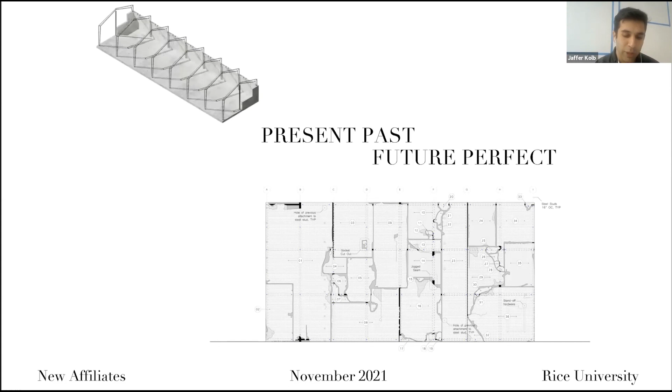A new life teased out of or inserted into exhausted structures. So in a way, Liz, you put a name onto something that we often think about, but maybe through slightly different language, and that's exciting.

So we're New Affiliates. I'm Jaffer and this is Ivi, and I'll start off and she'll pop in a second. We started 5 years ago, actually almost to the day, so in maybe a week or two is our 5th birthday, which is an exciting time. So maybe we'll just consider this our birthday party. Thank you for hosting it.

We do a lot of different kinds of work, from product design to ground-up buildings and everything in between. Thinking through past lectures on the topic of identity, we describe ourselves, I think, in a lot of ways. We've described ourselves once as victims, or maybe byproducts of New York City itself. We've described ourselves as necromancers, bringing to life zombies and other figures of the undead.

We've described ourselves as designers, as preservationists, never as theorists, but maybe as thinkers to some degree, as insiders as well as outsiders to the profession of architecture, which makes me think maybe we're actually just really good at code switching and performing different roles, recasting ourselves based on whatever clothes we happen to be wearing that day. But either way, there's definitely a question of identity, and us trying to formulate and reformulate the way in which we operate vis-a-vis the work and practice of design at large, over and over again.

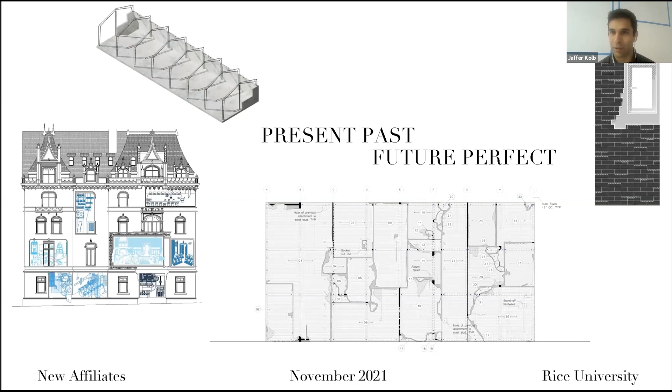I'll echo the thanks and say hello, and maybe just dive into the work and look to illustrate the introduction Jaffer just offered.

So we're starting with 2 building projects, both commissions to convert abandoned manufacturing units into art studios. They're located in East New York, just a few blocks apart from one another, done for the same owner. The one on the left was completed a few years ago; the one on the right, we're still working through the design. They seem like a good place to start to situate our practice as a prototypical New York endeavor—an intriguing place where adaptive reuse is normalized as this act of bending buildings into new versions of themselves, and at the same time, a set of buildings that we're very aware represents new users in known conditions.

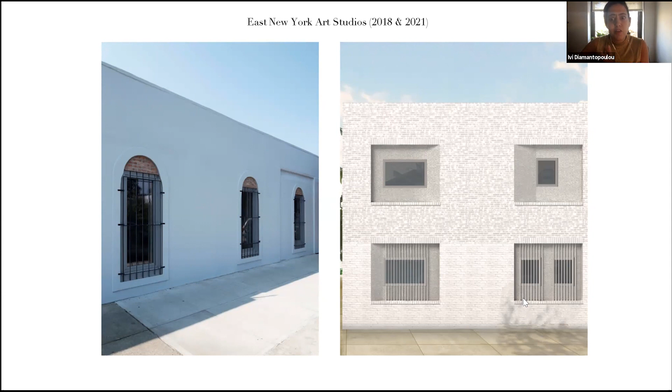We're on the edge of Brooklyn. We're very mindful of a neighborhood that's changing, and the way in which we respond to it has been critical. Luckily, alongside a great client who's engaging with local conversations and is invested in community building, we start these 2 projects.

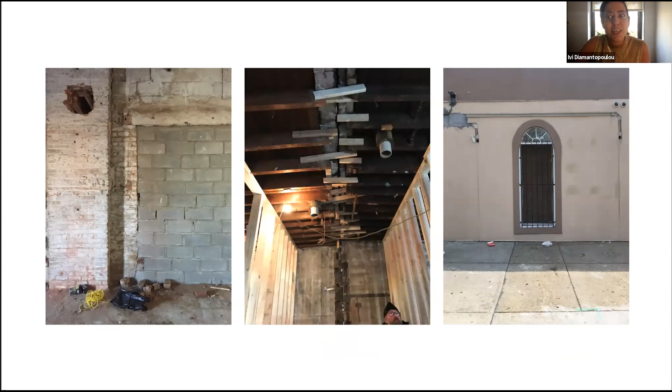With the first one, we're confronted with a long, skinny building—over 100 feet, with over a century of being used, reused, and misused. In these many decades and lives that the building has previously held, we enjoy seeing them inscribed on its surfaces, in the way it gets us to want to know more about what has happened.

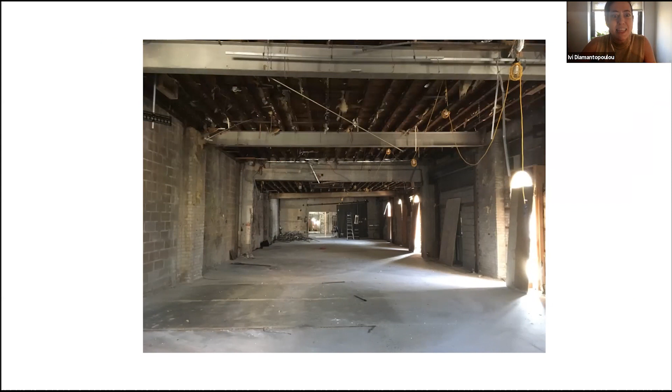So we start design from 2 ends at once. On one hand, getting to know the building, unraveling its layers and its Daedalus-like interiors that somehow compartmentalize this massive, overhauled structure. From the other end, developing a loose understanding of our program's relationship to the street and the shell, a little bit like a master plan.

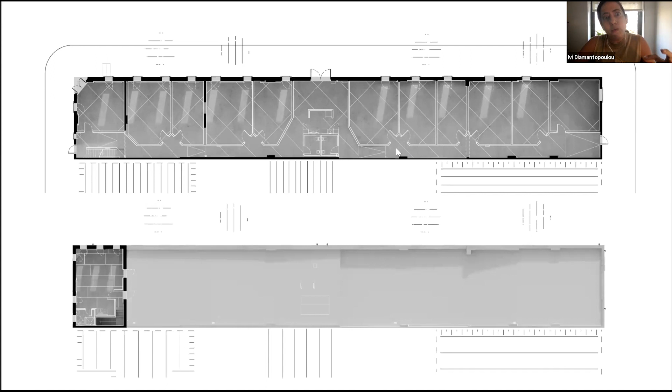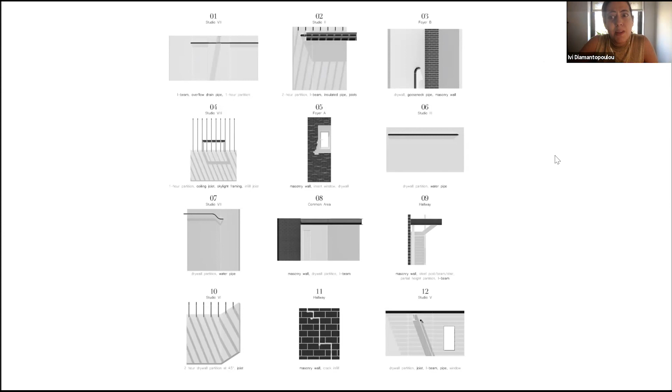It was apparent design-wise that we wanted to attach studios to the windows for light and air in the front, and then keep circulation in the back, devising a way to interact with the relentless linear character of the building. From there, we wanted to bring the 2 together—so our 2018 idea of how this building could lend its proportions to this new set of occupants, gently responding to the moments of friction with the existing conditions we sought to preserve.

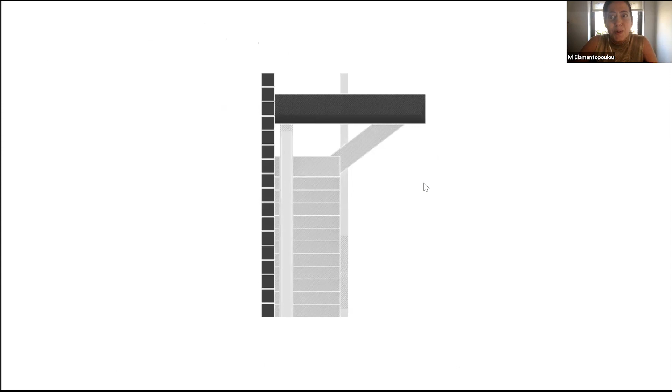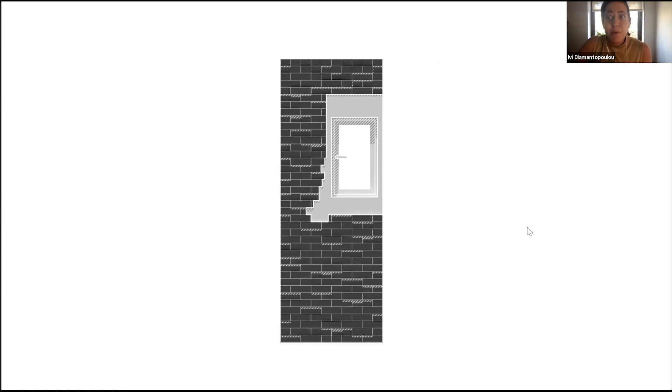From obsolete skylights to infrastructure poking through the walls, we thought drawing conventions begin to fail us when we want to engage something with specificity. Partly that makes erasure a rather easy task, leading into the slippery slope of self-similarity and seemingly objective construction logics. So we loved making these drawings to highlight precisely that we did not wish to arrive and pretend this was a brand new building, but rather be aware that we're adding one iteration to many.

This is also how we thought of the facades, where the infill remains legible in the form of bricks—perhaps you can see it a little better in the pictures. And it's just at large, inside and outside, so it's new and sleek and clean, juxtaposed with the aging and the found.

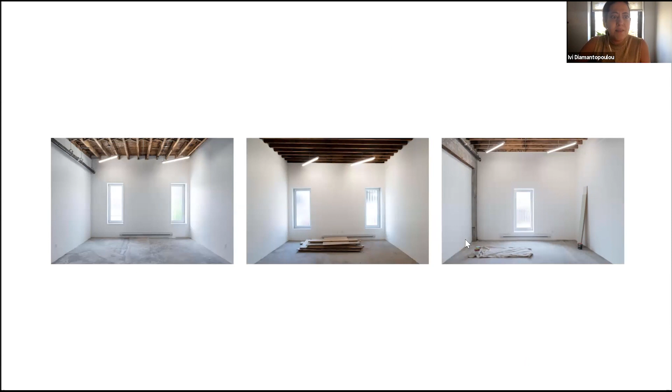At the scale of the individual room, again, geared towards white box space that is somewhat unprecious. Each one is shaped by these negotiation drawings, becoming a little different and contrasting what we think about as conversational and negotiated, or pre-existing, predetermined, and found.

The second building, just very fast with a little bit of information still, doubles in size and somehow wraps the same logic around, becoming even more introverted in its logics. It results in this donut-like plan with studios on the perimeter, again defining this inward-looking figural void at the core.

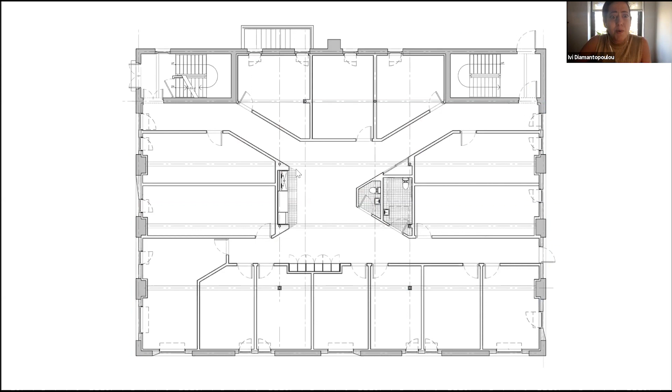Here on the first floor, perhaps the most articulated space becomes this shared center, which then, as one goes further up from the street, kind of finds its way onto the windows.

The facade today is a kind of point of departure and a space to negotiate, and also to learn from, in the way that the original building is cemented and carefully punctuated.

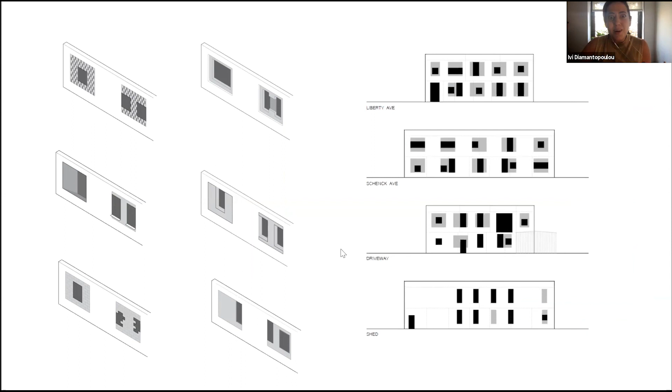There's something about the solidity of the building that felt right to us, and the other way around, that understanding that the original, massively open character of the building has already become antithetical to its own structure.

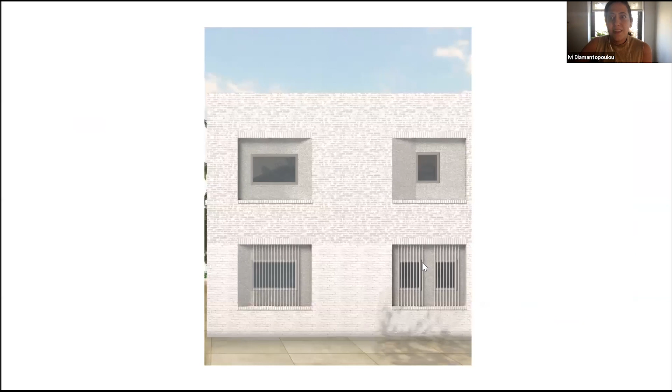And ultimately, the design becomes this balancing act of letting light in and allowing some of the individual characters in the building to poke out, while bringing the two together on a layer that is subtly pushed inwards in order to delineate interventions over time.

And in thinking about time in the context of this building's very present past, we're inclined to measure ourselves and only change it that much, so as to preserve the way that those familiar with it continue to engage it.

So yeah, I think if the first couple projects outline sort of what we might call structures of familiarity that are embedded in the fabric of the city, giving us a sense of introversion, this next one is maybe a bit more a structure of exception.

So this project, done in collaboration with the artist Rashaad Newsome at the Park Avenue Armory, is planned for early next year, actually just a few months from now. It'll open in February of 2022.

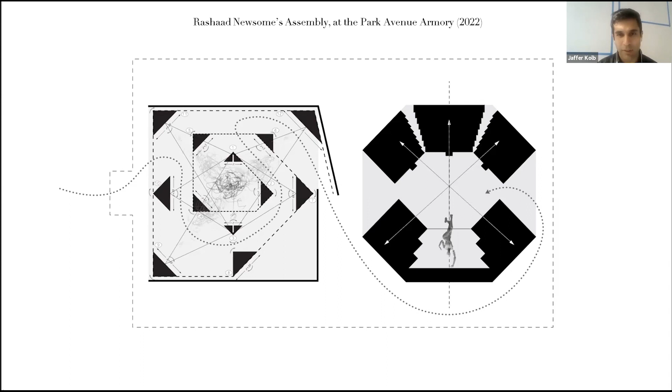And getting to work with the Park Ave Armory, for those who don't know it, was a real dream for us. It's a massive space that began as a kind of military hall, an armory with a very particular function, that over the last several decades has been co-opted and used as an art space. This transition of one type of program to the other, in an incredibly idiosyncratic, enormous building, required us to think about identity in a very direct way.

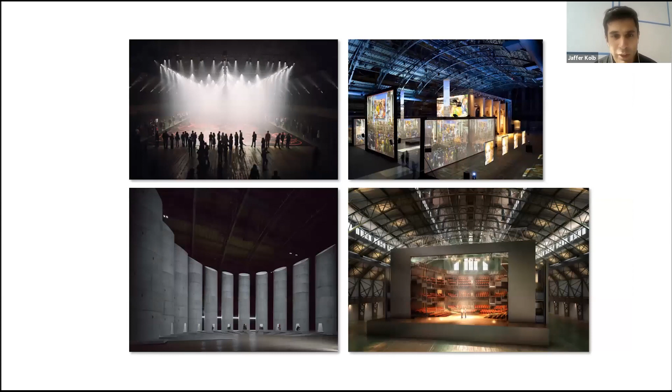We had to think through recent attempts at engaging a kind of formal dialogue between new interventions and existing material. In our case, however, it was maybe complicated one degree further by the collaboration with the artist.

So Rashaad Newsome, if you don't know his work, you should familiarize yourselves with it immediately. It's quite amazing, but it basically deals with cultures of Black queerness over the 20th century, specifically looking at things like the ballroom scene, voguing, and translating that into codified information—in this case, artificial intelligence.

Rashaad is currently leading a research division at Stanford that basically programs AI to perform an improvisational sort of queer aesthetics. And so for us, this kind of dialogue between the Park Ave Armory and that specific work was really an exciting starting point.

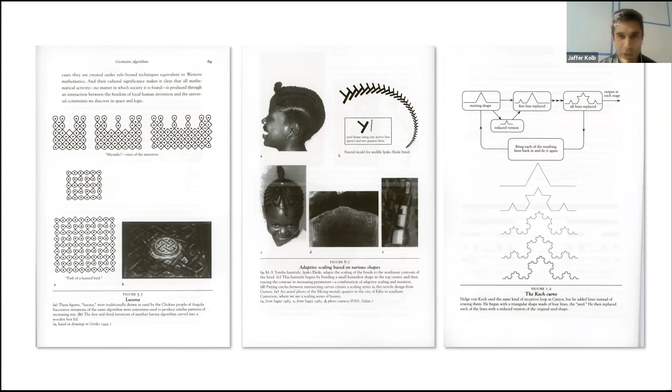The other moment that was really great was when Rashaad asked us to look through this book with him and allow the design to be inflected by some of the material contained in it. So we got really interested in African textiles, pattern making, systems, disruptions, fractals—all these things that operate across many media and inflect everything from hair design to clothing to architectural geometry, et cetera.

We also got really excited about the idea of spirals, which we began to translate into our plan. So you can go next.

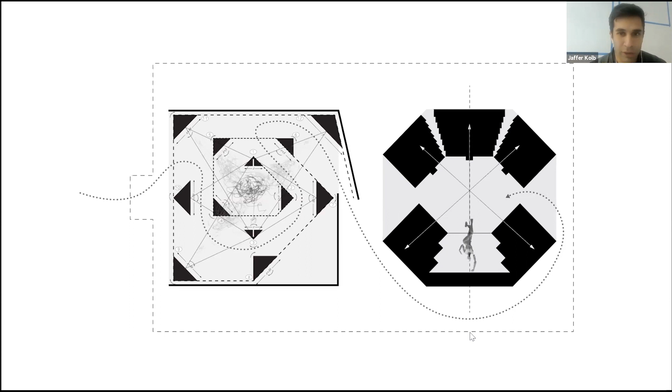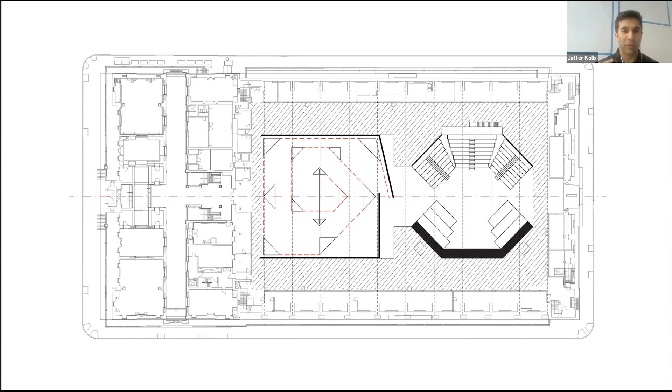One of the things that was really important in order to engage the armory was to not think of them as completely sealed off, but to relate them to the periphery. So we eroded both the gallery and the theater so that when you're in the space, there are all these cracks through which you always reframe the building itself.

So for us, this identity game of queering the armory felt like a really amazing way of both engaging in architectural material, but also revisiting what one can do in an existing architecture. And that's something we've worked on a lot through some of our work with institutions.

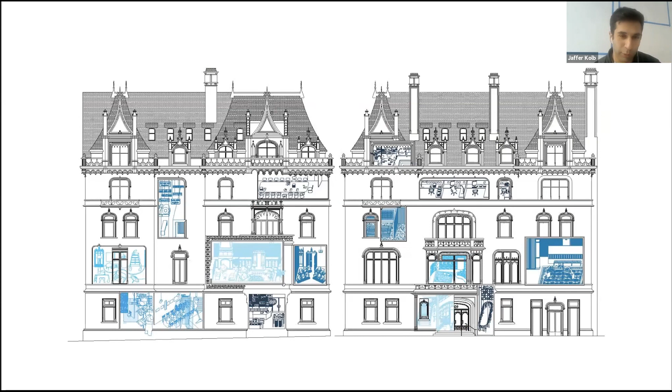So now instead of presenting a project, maybe we'll just talk quickly about a museum itself. This is the Jewish Museum. We're currently working on our 5th show with them.

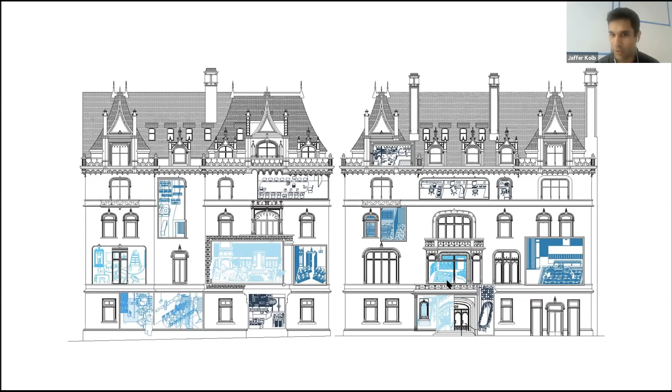This graphic novel style illustration represents several of those exhibitions all happening simultaneously within the shell of the museum. We're starting to think more and more that we're like haunting the museum as ghosts, inserting ourselves in every crevice. Next, these are just 3 of the 5.

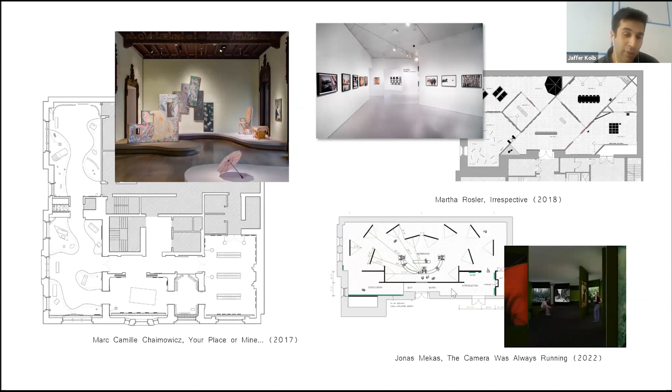I'll go a little further into one, but as you see, each plan and each space strategy is completely different and autonomous, which to us creates this kind of simultaneity.

When we look at the fixed plan of the structure of the museum and all of the work we've done in it, there's this crazy sense of different timescales operating at once.

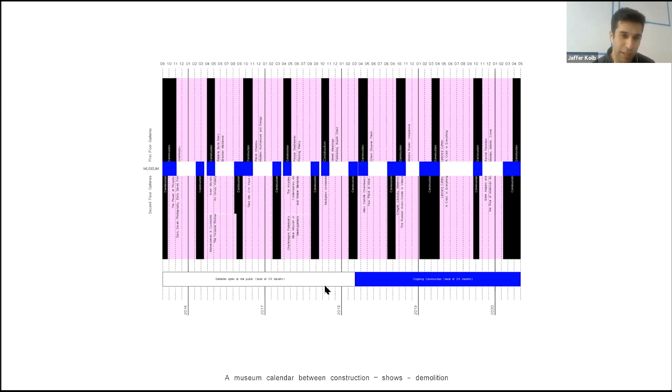Which led us to get really interested in this idea of how the museum operates as a kind of organism. This is a nerdy schedule looking at shows deinstalling and installing, realizing that over the course of a year, or even 5 or 10 years, the museum is constantly in flux. It's constantly transforming, almost breathing at the rate of the shows going up and down, which we found really fascinating when thinking about the life of a building.

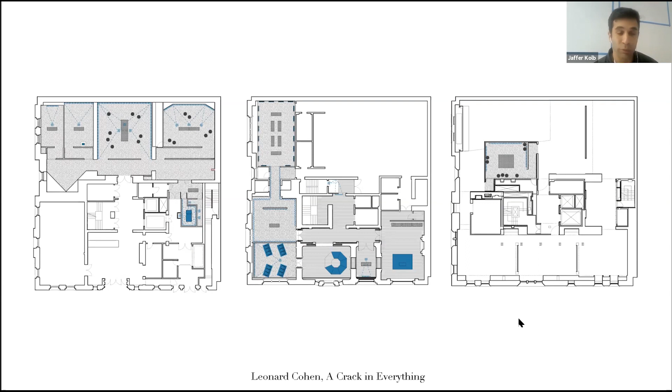Just to look at one show in particular, this is a show we did after we'd done maybe 4 different exhibitions. This is Leonard Cohen, A Crack in Everything, which Liz mentioned in the introduction. This is an interesting show because we partnered with the Department of Sanitation in order to think about reuse in the context of exhibition design.

As a formal project, we thought this show was interesting because it operated on all three floors of the museum. Because there was a lot of sound buffering needed, we had to operate within the cavities of the walls and ceilings, so we really felt like we were inserting ourselves throughout the museum in a very free way.

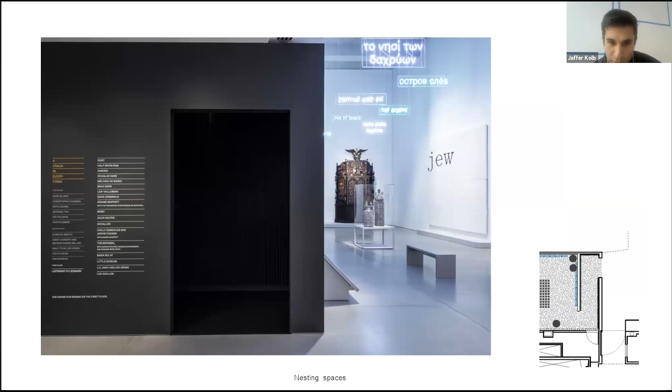What's interesting here was thinking about the context of reuse in exhibition design, and our partnership with the Department of Sanitation.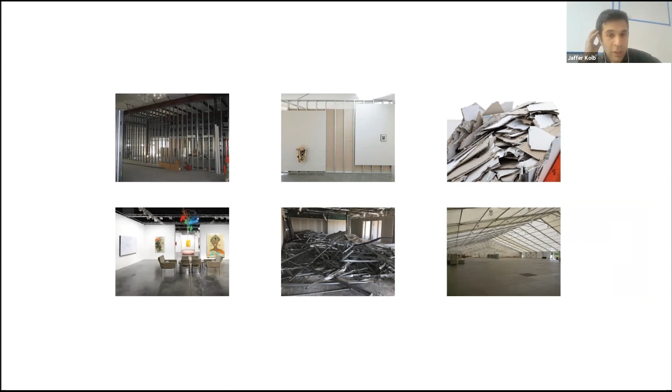This allowed us to work with the Jewish Museum to catalog all of the exhibition waste from five prior shows and start to rethink how we could intervene in that process—basically doing a very serious post-occupancy dialogue with the Department of Sanitation to make sure everything we used could find a second life after the show.

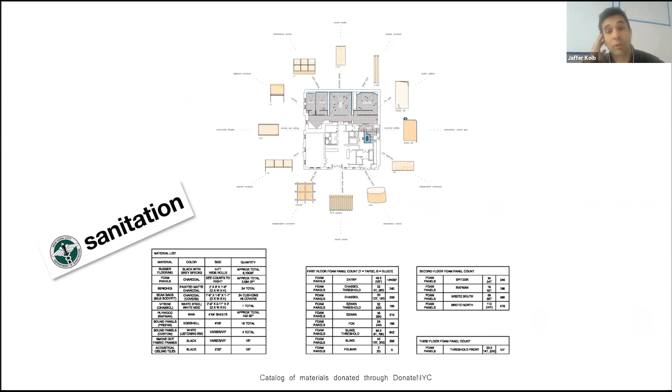This included the rubber flooring, the acoustic foam panels, benches, subflooring, vitrines, seats, and even ceiling tiles. Finding new lives for everything while designing something was a kind of fun experiment to understand how reuse could be anticipated.

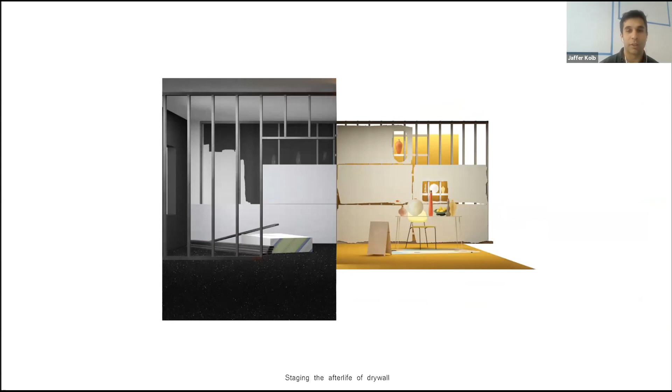These are a series of diagrammatic renderings we made with the museum to look at foam being installed in a way that could be transitioned, vitrines moving between museums, a floor becoming a new public space. What was really exciting is that at the end, almost everything except for the drywall itself was reused—a successful experiment that happened just before COVID.

Just about the same time as the Department of Sanitation was distributing Leonard Cohen's materials, the arts biennial Performa invited us to give a performance lecture, so we saw in this an opportunity to consider what performance might mean for our field.

We imagined that if we just moved further and further back from our individual projects and observed this massive network of work happening between us, our colleagues, our peers, and the world at large, we might start seeing products and byproducts extracted and deployed and tossed away, starting anew.

Within this network, coming out of Cohen and all of our drywall leftovers, we wanted to look at this one material in particular. Because come to think of it, it's rather unremarkable, but also fascinatingly everywhere—it can take on any character you assign to it, and regardless of what happens, it's always new, fresh, unbreakable and treatable.

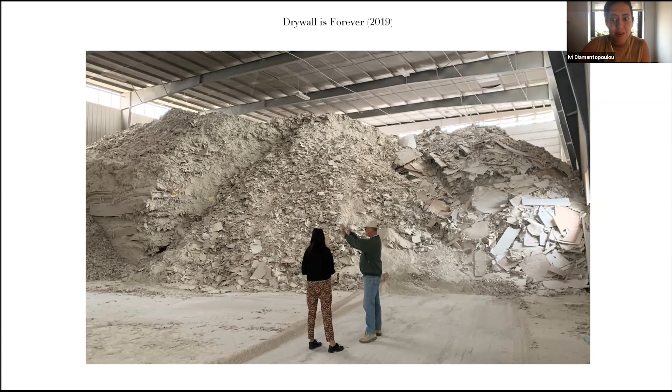Except when you see it piled up here in the recycling facility, you begin to understand the magnitude of its problematic circulation. This is all taken in one of two reuse facilities in the Northeast, where essentially they collect clean scraps and turn them into agricultural products like animal bedding, or parts of it go back into the board-making industry.

The thing with gypsum is that it's generally rather innocuous—you might find it in your toothpaste or food products. It's also an ample resource, because we're not really at any risk of running out of gypsum anytime soon in terms of extraction. Where it becomes really problematic is when it ends up in a landfill within the context of mixed construction and demolition waste.

When put into anaerobic conditions, it transforms into toxic chemicals, bringing that back into nature. So we thought this is an ecological problem, obviously, but also a sort of material identity issue that we could begin to take on.

We looked to devise a way to engage drywall that pushes against its pristine, single-use ethos. For that, we started by collecting small pieces from as many exhibitions as we could intersect with within a given moment in time—I think it was just a month, October of 2019.

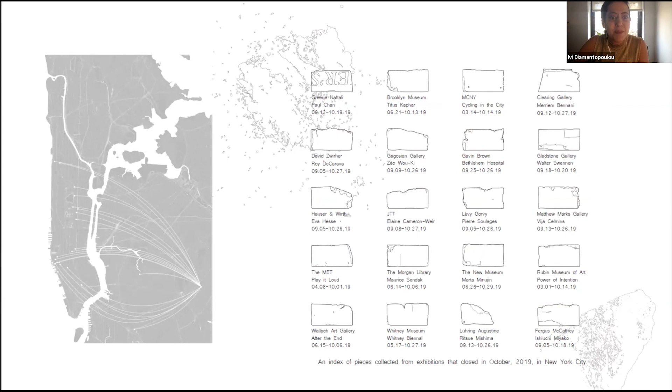Those we looked to stitch together specifically push back on this idea of the pristine white cube, this modernist ideology of displaying art in this timeless, apolitical, iconic, non-specific, completely shielded, anonymous space. We thought maybe there's a way to understand that the walls themselves being taken down, constructed, and reconstructed carry a narrative and a kind of provenance, and potentially even a new kind of ornament.

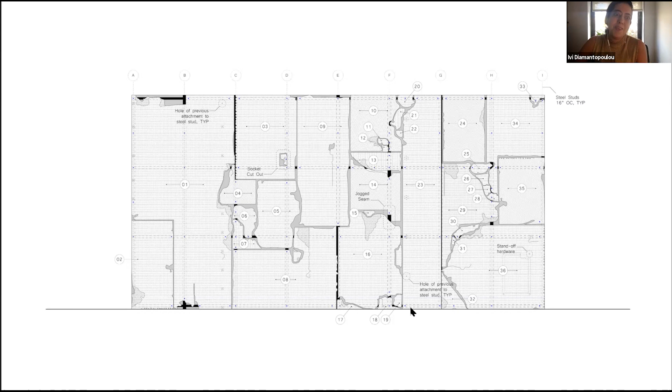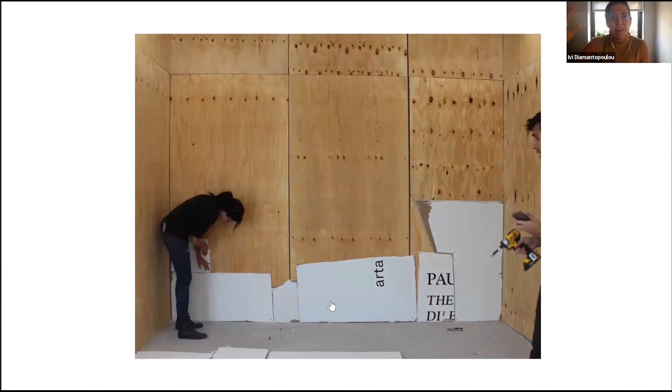So this was our provisional sketch for how we might begin to puzzle things together. For a few days, the two of us engaged in this massive puzzle making, stitching together different pieces of different thicknesses with different leftovers from shows over time. Starting from just arranging everything and thinking about massive seams, how to putty and join, erase, and at the same time preserve a little bit of the memory of the pieces that came together.

It was days, I'm just gonna say. I am so bad, I know. That'd be a dark moment to realize that took us weeks. Yeah, it is wildly inefficient, I think.

Following on the Drywall is Forever project, we recognized that we wanted to engage in another branch of material research, maybe paralleling that methodology. Just recently we were invited by Sarah Lawrence College to do an exhibition of our own work there, and we saw it as an excuse to dive into another material.

Maybe because of the collegiate environment of Sarah Lawrence, or thinking about the upstate quarries, the ecology of upstate quarries, we decided to turn to granite and try to think through it a little bit, maybe within a similar method or framework as drywall. But of course, while equally ubiquitous, granite is also incredibly different from gypsum. It's heavy, it's immovable, it has a totally different kind of history within our discipline. For us it began as a bit of a cultural question.

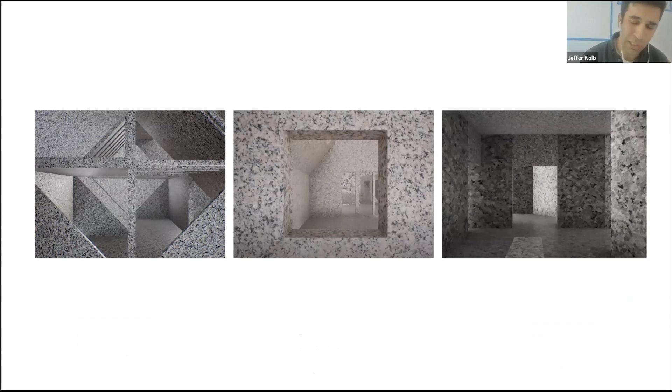We paired this with a speculative rereading of our own work. We took three of our projects, two that were built, one that was a feasibility study, and rendered them as monolithic granite proposals, thinking through the relationship between form, shape, and stereotomy, and that accumulated, aggregated surface project. So granite as surface versus granite as monolith, read through our own projects, felt like a fun way of thinking about the technologies and media of granite itself.

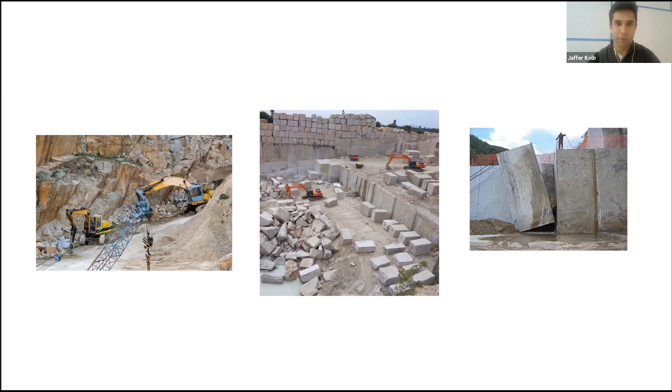This research obviously coincides with a larger study on processes of material ecology, of excavation, of labor, of transportation and infrastructure, and material logistics. This became a really interesting way of thinking not just about the material itself, but about something so heavy, so immovable, whose history of deployment is indisaggregable from its history as a heavy, immobile thing. There's a kind of elision between the proliferation of its implementation and the difficulty of extracting and mining it.

We then looked at the present state of granite products and found a range of new possibilities, including these ultra thin stones down to 1 centimeter thick, making a 4-by-8 foot slab of granite—which should now be called a sheet—equal to 2 sheets of drywall. Suddenly we started seeing where these systems could come together, and that felt like an interesting design prompt for us to play with.

This last image is a very early speculative design. This wasn't done for the exhibition, but was done afterward, thinking through how we could take the infrastructural logics of granite and treat it as an architectural proposal—in this case, a dismantleable and movable set of these 1 centimeter granite panels built into furniture that can be treated as a new sort of domestic interior.

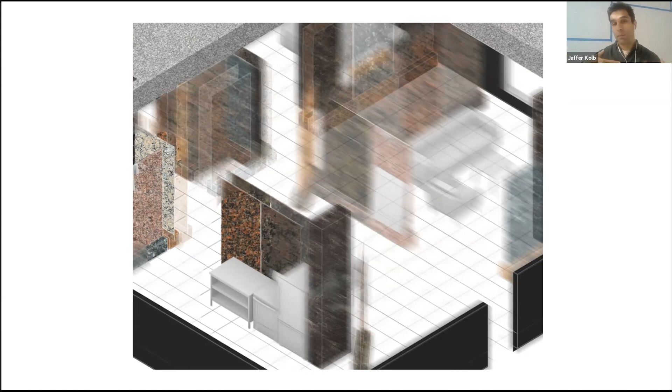So taking the image we might have of a McKim, Mead and White building, and the image we have of a kitchen counter, and trying to combine them into a new hybrid of a lightweight granite environment that may be light permeable, that might be movable and reassemblable, as a new investigation into the possibilities that granite might offer.

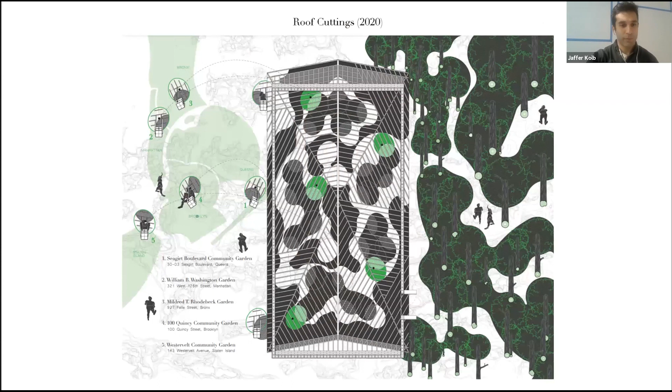I might actually just skip over this one to spend a little bit more time with testbeds—that is, the following projects.

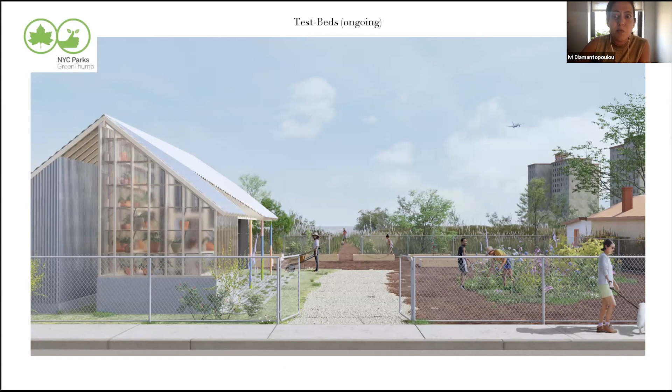So very quickly flipping through our architectural league exhibition, to maybe continue the conversation somewhere at the intersection of granite and drywall, reuse and the politics of the cultural imaginary in this project that looks into assemblies in the space of a singular material.

Specifically, we look at these very elaborate and often iconic assemblies that are mock-ups. As you may know, in large-scale construction it's typical to build a chunk of the building to test out its visual or performance qualities before making a massive super tall tower or custom piece of architecture. It's an exciting moment, and also a very fast one.

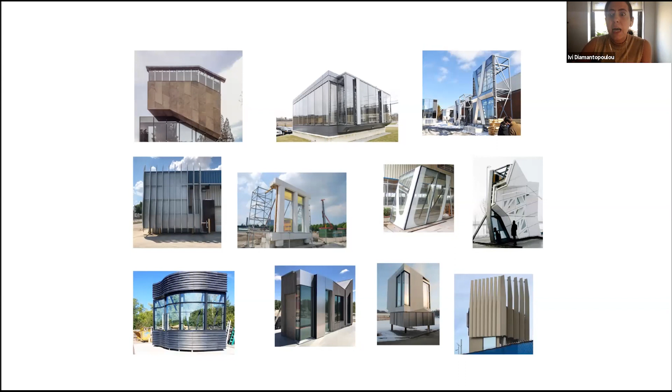These building excerpts represent a tremendous cost in labor, material, efforts, finance. They're often $200,000 or $300,000 at a time, and yet very fast they go from these iconic preludes to the building that's supposed to come, to complete junk. That hard and fast transformation was something we found completely stunning.

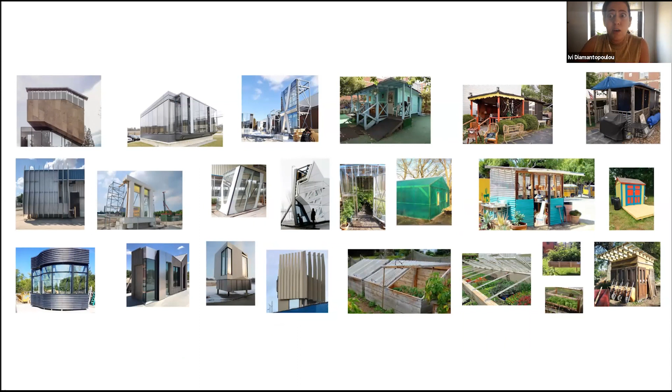I should say, and this is the best audience to say this to, we've developed this project in collaboration with architecture historian and former Rice Fellow Sam Stewart-Halevy. Between the three of us, we brainstormed extending the lives of these structures through resituating them or reimagining them as casitas or greenhouses across New York's vast network of gardens.

On the one hand, because it makes logical sense in a scalar, straightforward way. On the other, because this idea of the mock-up representing an investment and becoming this kind of cross-city exchange token between tall skylines and down-to-earth communities seemed to us all too compelling. This becomes a dual resource, both as a material kind of gift and as an image or an ambassador.

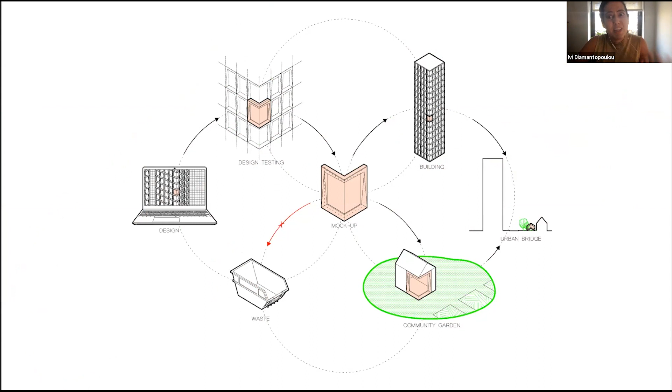Or this urban bridge. So we began with this collection of sample mock-ups, just totally imaginary, gathered from the internet, and imagined them in new orientations and roles, trying to test the limits of how much we can reorient them and situate them in this new world of gardens and open construction, with ease and transformability.

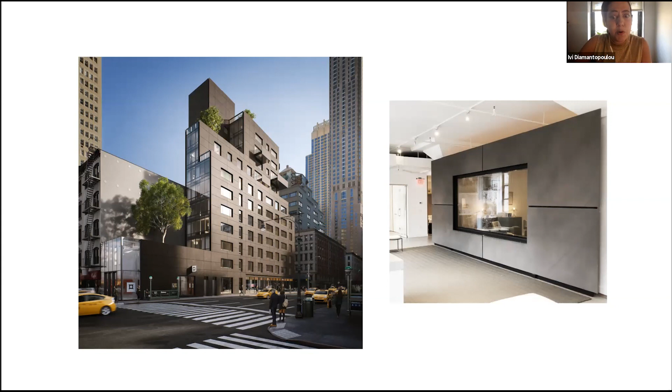With those, we reached out to the New York Department of Parks and Recreation, who has since been our partner for the project. Shortly after, we were donated a mock-up coming from this condominium in Tribeca, 30 Warren, designed by post office architects.

Parks paired us with this amazing garden that was just getting started, pre-pandemic, out in Edgemere off of JFK. We worked together with the gardeners to imagine how this mock-up could become a cornerstone of this larger shading structure, which we see here on the site plan.

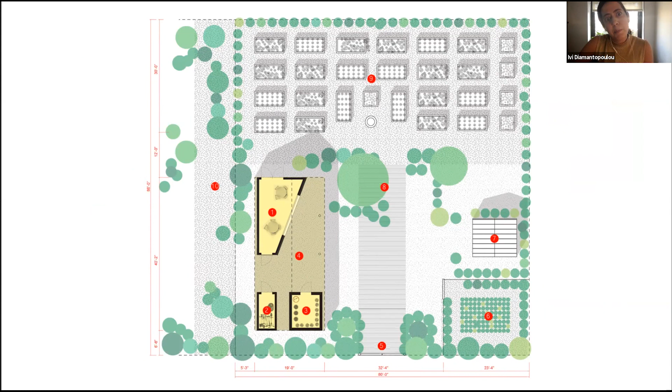So it's important to us that it's not all about the mock-up. The mock-up is the kind of instigator to respond to, co-building with the participants. In this case, the plan is made of three smaller structures: a community room, a shed, and a greenhouse, all housed under this larger roof or shading pavilion, all planned together with the team.

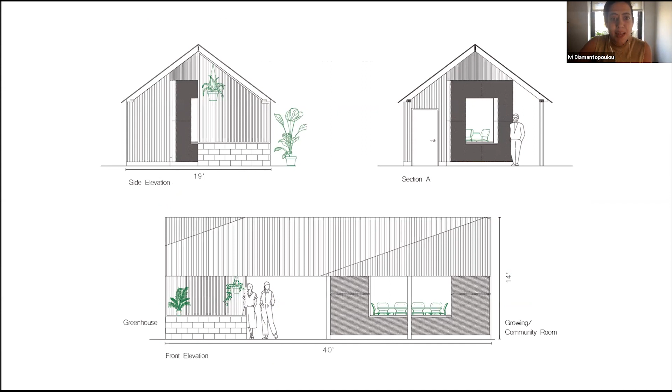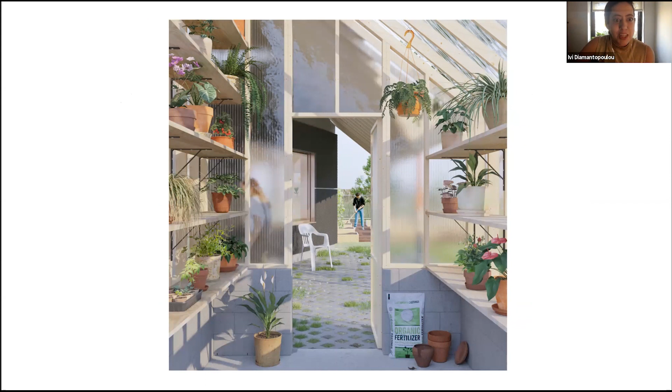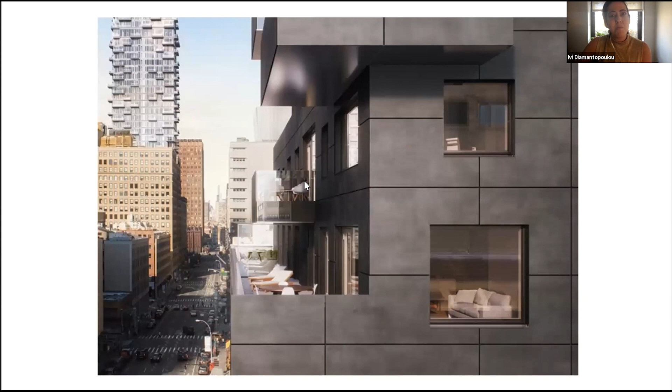In resituating the mock-up while giving it a new life, we've seen it through the lens of its new material friends, the plastics and the 2x4s, in this kind of condition of informality, in contrast to its maybe more strict Tribeca counterpart.

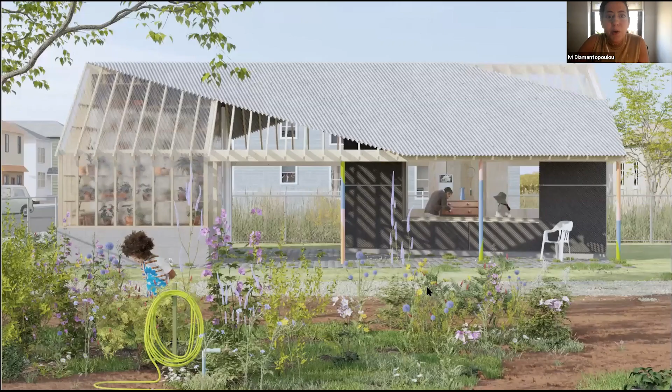We've said this in every lecture the last few years, I'm gonna dare to say it again: we're very close to getting this built after all the twists and turns we've gone through the last years. We had our initial construction meeting just a few weeks ago with members of the garden, our construction team, and our team. This is Sam, who's not with us today. So we're hoping to really complete this project.

More importantly, we're really interested in seeing this as a systemic operation that builds upon not just the one mock-up, this one structure, and one garden, but really as an infrastructure that works cyclically and continuously resituates, reorients, and re-engages these byproducts of fast construction, feeding this forever need for open and accessible public space.

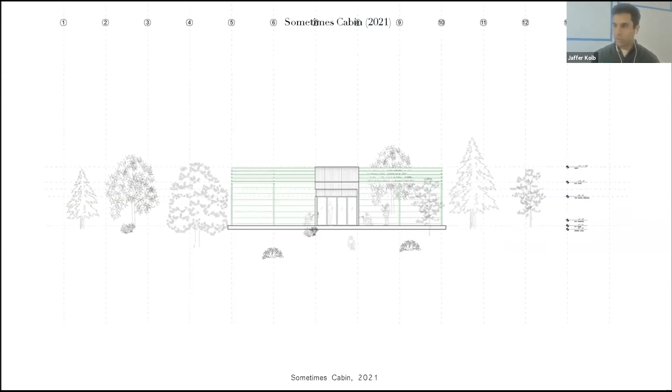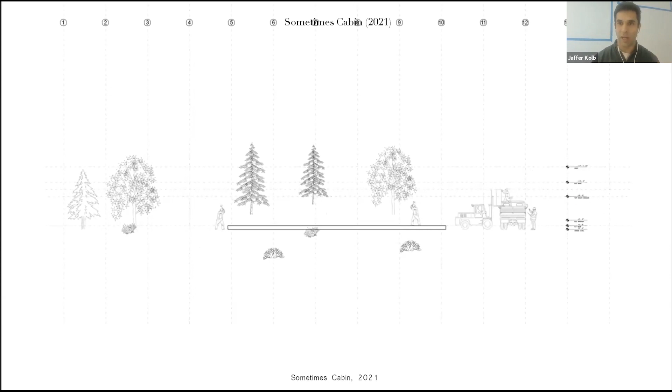Last project. We thought we would close out with this project we're calling the Sometimes Cabin, maybe prompted by this conversation around building identity. I think a lot of the projects we showed today assume a certain degree of inherited material, whether a mock-up or operating within an existing institution or warehouse building to make new art studios—it always implies there's something there. One thing Ivi and I try to think through a lot is what one does with a kind of carte blanche, a ground-up idea, and whether we can still test out these ideas about time, duration, and identity within the context of a new build.

So this cabin began as an exploration of pre-engineered building systems and also an exploration of the context of rurality, the rural outside the city. We began looking through old issues of Radical Faerie Digest and thinking about back-to-the-land movements in the 1970s, which represented to us a kind of radical form of utopia that was both ideological but also incredibly material in terms of their articulation and development.

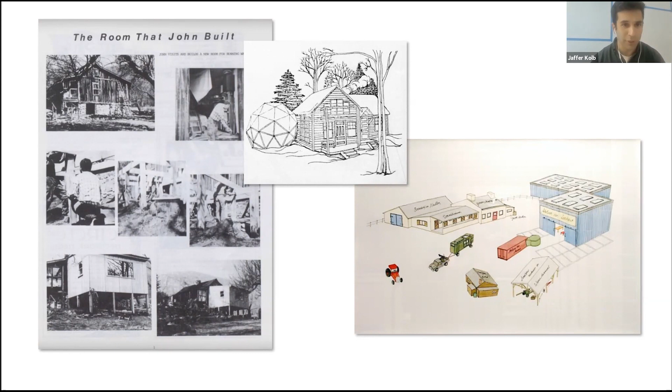In this case, the idea of a sort of homestead that can grow and adapt over time, that folds in different kinds of architectures, and that is inherently treated as something fungible and not fixed. That particular context seemed really exciting to us.

The way we pursued the work was thinking about this typology you see on the right—the pre-engineered steel building, which is actually an incredibly common type across the country. You can go and download one online, order it, and build it very quickly.

It's actually displaced a lot of what we can do as architects and what we're asked to do as architects. This is what you use to make a barn, an airport hangar, a shopping mall, whatever it is—and then to pair that with something that feels changeable.

We considered the pre-engineered steel frame a semi-fixed system, but then there's the kind of DIY—actually quite related to the mock-ups project test beds that Ivi just showed—something that could actually be transformed by the people using it.

This led us to a lot of research on different types of cabins, buildings, farmhouses, barns. We even inserted ourselves in there in our big pile of gypsum, thinking through loose issues of reuse, aggregation, material systems coming together, different assemblies, mass production, and customization.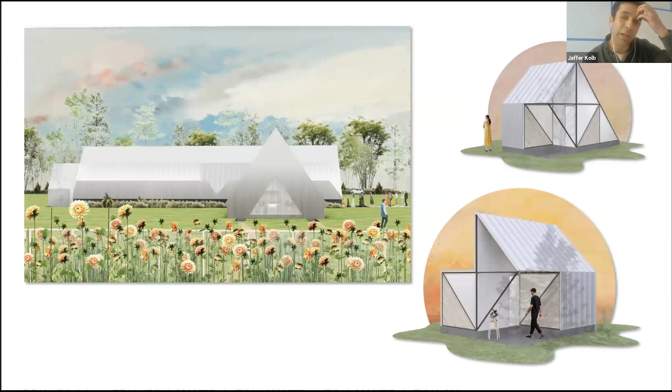This was also instigated by a project we were working on, done right around the beginning of COVID, or the year before. It was an ecotourism site in Michigan on a flower farm where we were asked to design an event structure—about a 5,000 square foot event structure—and nine cabins. Very upsettingly to us, this project was killed during the early days of COVID when its primary investor pulled back and never reinvigorated it.

Through those projects, we began investigating these systems of pre-engineered buildings that we thought we could adapt and hack. That led us to Worldwide Steel Buildings, where we played around a lot with ordering different steel barns. We also taught a studio at Columbia, an option studio on this topic, which was super fun, where the students were actually in communication with the company to test the limits of pre-engineering.

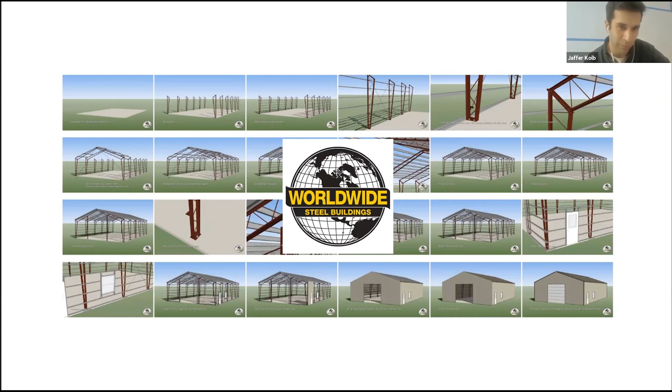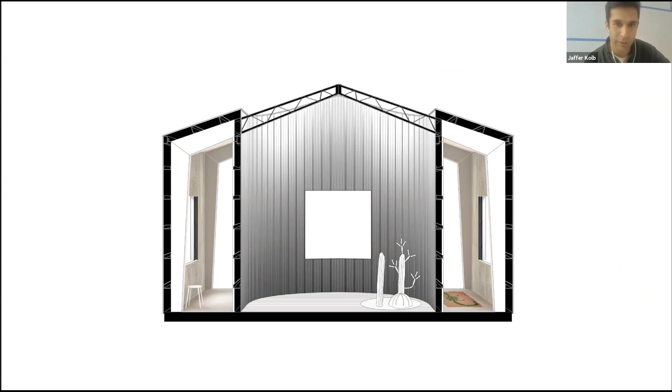For us, the steel frame was really a starting point to think about what a semi-fixed structure could accommodate as a kind of movable mass underneath. So we engaged a series of studies about building on, under, above, and around these steel frames to create new open courtyards, or different ways of having long corridors surrounded by built space, things that pop up from the structure.

We treated it as a very loose design exercise that ended up reformulating itself as an investigation into a housing type we were being asked to consider during the pandemic, when everyone was moving out of cities to the country and wanted to build cheap, fast things.

In this case, we thought about the steel frame as accommodating not just different formal configurations, but different thermal configurations as well. On the far left, you see this steel frame gets inserted with a tight pack of cellular rooms.

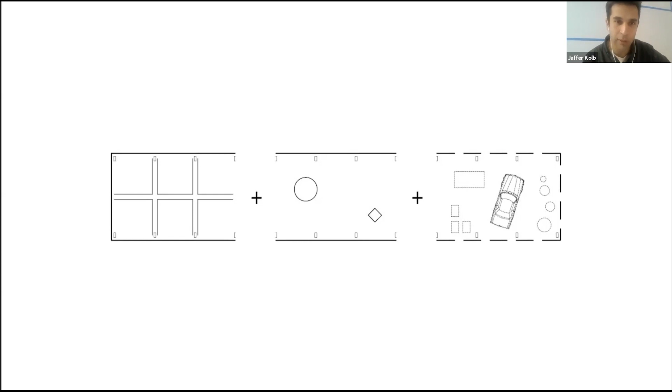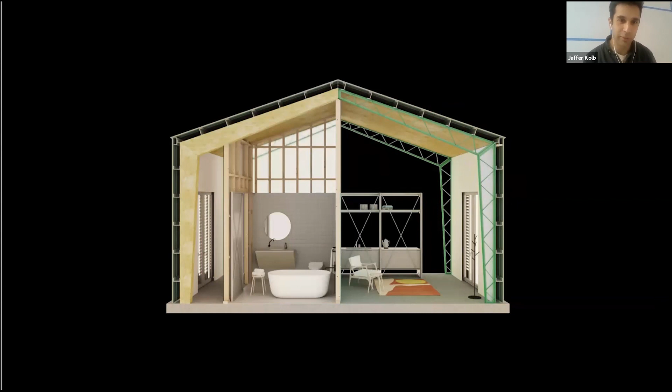We saw all of this as being accommodated by the system of the steel frame, which is exciting to us. This also lent itself to invention around material assembly and catalogs. So going from a heavier open space to playing with more industrial, easy-to-adapt systems that could be uninstalled and reinstalled and moved over several years, to something that felt more permanent and fixed—in this case, a mezzanine bedroom and two bedrooms underneath. Again, all thinking through different ways of occupying that frame.

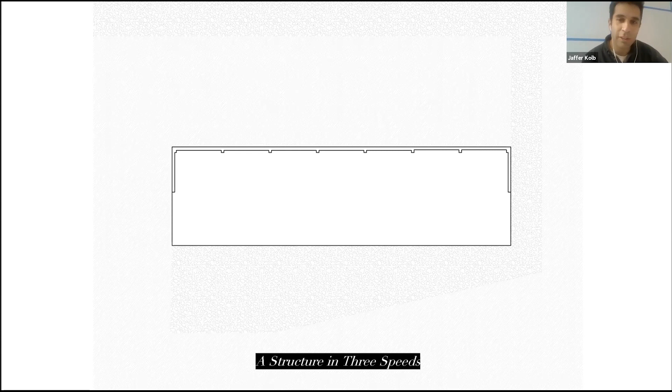So what came out of that research investigation is a project currently under construction, which we're calling, I guess, both sometimes cabinet or a structure in 3 speeds. In this case, we start with a concrete pad and retaining wall.

And we look at how that can accommodate this plan, which we think of as operating at several different timescales. So here we see the frame, the concrete, a kind of wood structure, and inhabitants operating within that.

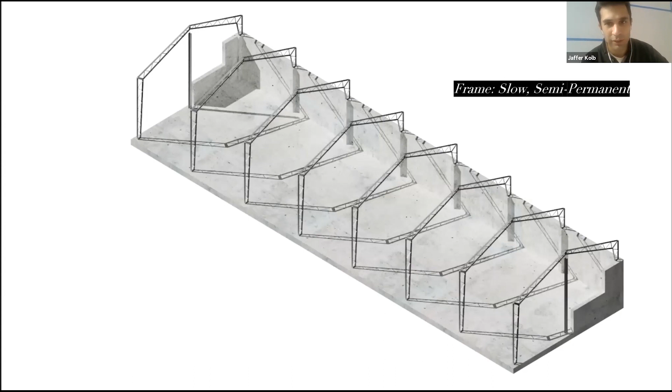Just to walk through it a bit more, we see the hybridity of the steel and the concrete as something that's slow or semi-permanent. So we think of this base of the project as like a 50-year project, say.

And then the wood frame building that gets built underneath it could be something that exists more on a 5-10 year schedule. So the interior walls and everything could be reconfigured. You could imagine it actually popping out from under the steel canopy.

And this presents a kind of lightness. In this case, you can see on the far left these 3 tightly packed bedrooms, in the middle this big open space, and on the far right this idea of a screened-in outdoor porch.

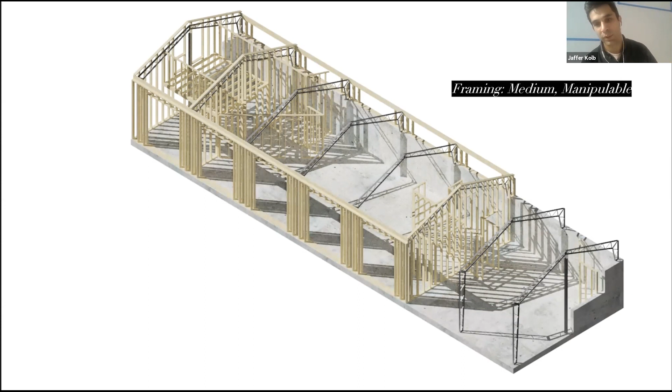And then, in addition to the 5-10 year plan, something that maybe exists more at the scale of a day or a week. So in this case, a tensile fabric super-skin that covers the entire structure, which is in constant flux, activating this outdoor enclosed space at the front that could be deployed very quickly.

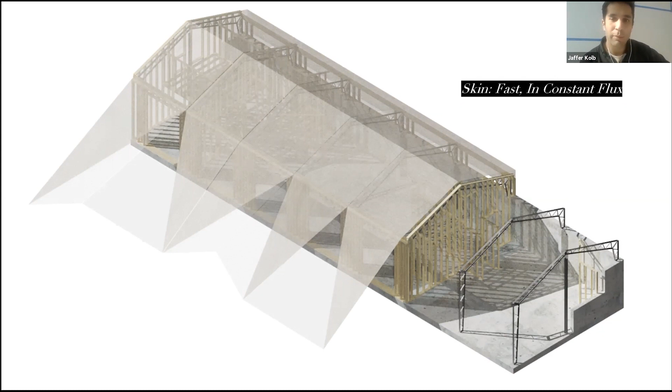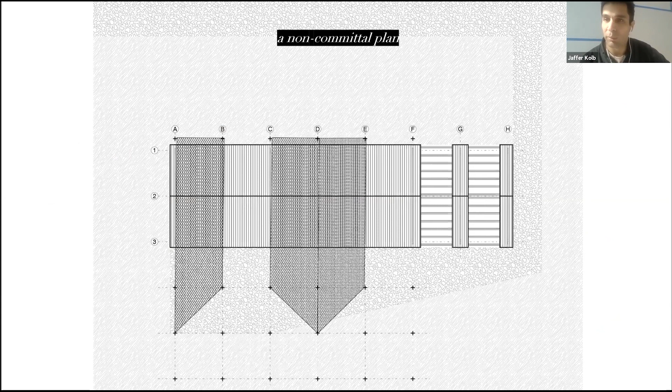Which we represent in this plan. So we're calling this our non-committal plan—basically creating a super form over a fixed form that's constantly adaptable, done in canvas rolls that attach to fixed points in a grid on the ground in front of the structure itself.

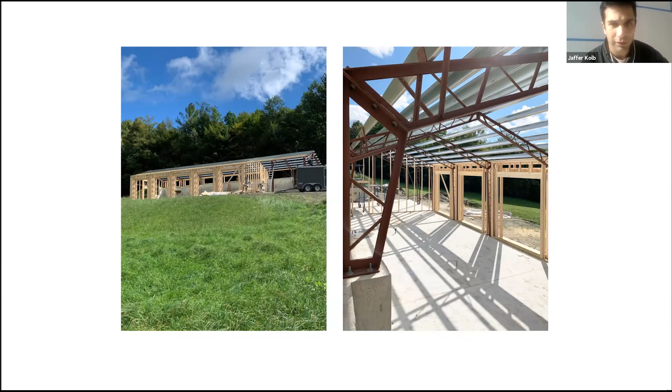We'll end with just a few in-progress shots of the installation and construction. To us, what was really exciting was actually seeing the steel frame and wood frames come together in novel and various configurations. And the details of how one accommodates the other seems to be an endless game that we can play with. We can end there, I think.

Maybe just in closing, we want to point out that we purposefully framed this talk between two building projects, from the studios to the cabin, bracketing other scalar or typological investigations in between, which is really just the way we practice and look to shape our ethos as designers.

care for control—our meaning collectively ours—to explore instead what it means to be relational and open to adapting at large and through engagement, whether that is with actual matter, as it is in overbuilt Brooklyn, or in the case of the Alpine Hills of the Northeast, just building culture.

And of course, going back to the main question of the series today, and attempting to respond to it one last time, these do result in form, where form here is a product of friction, rendered apparent in varying degrees each time. Thanks very much.